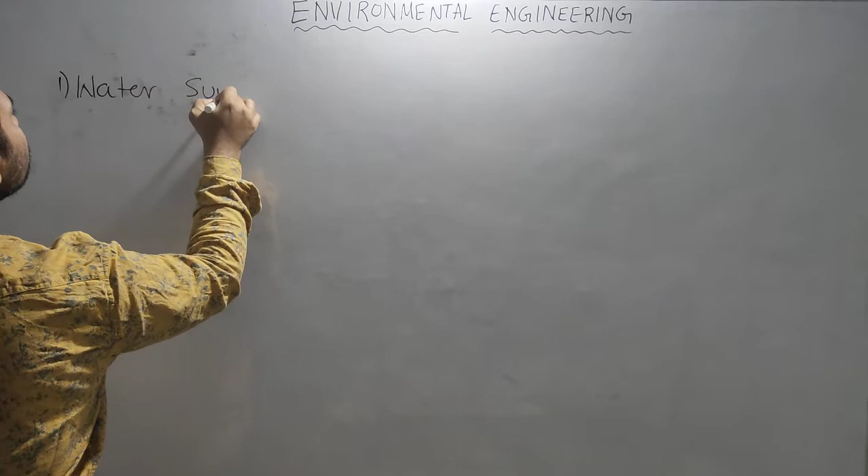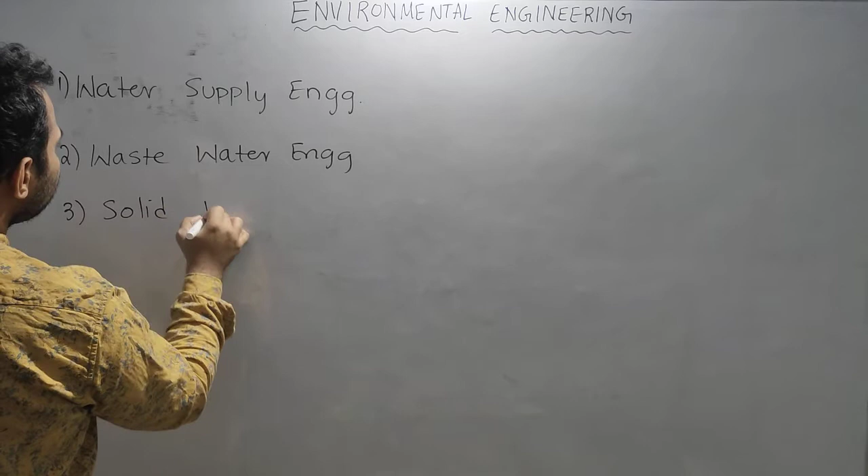This topic is broadly classified into water supply engineering, wastewater engineering, solid waste management, and air and noise pollution. These are the topics we are going to cover in our environmental engineering subject.

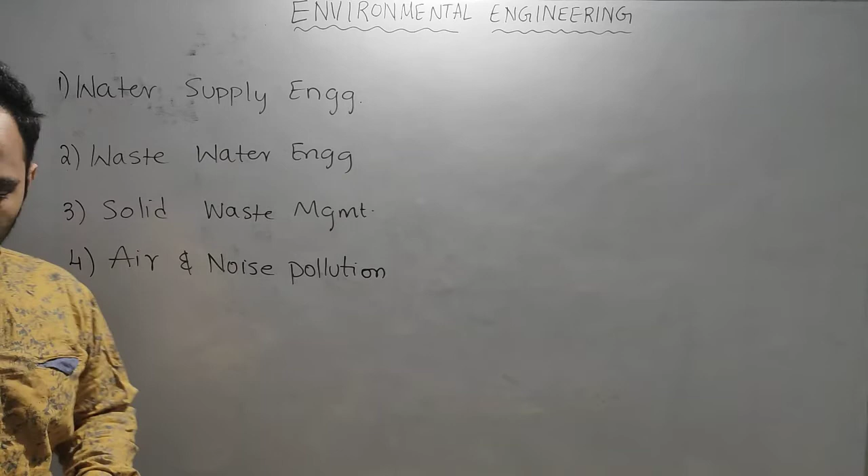Let us start with the water supply engineering. What is meant by water supply? Where it starts, where it ends. What are the various components of this water supply engineering, and how to design those components, what is the criteria of design, all those things we are going to learn in this subject.

Water supply engineering, see, it is a supply, we are giving water. So if you are giving water, then you need to have the water first. Where will the water be present? So water may be present in oceans, seas, rivers, or lakes.

Though water is present in oceans and seas, purifying that water and making it fit for drinking is a costly affair and not necessary for a country like India, because we have plenty of fresh water in the form of various rivers. That is why we use river water for water supply. So the sources are the rivers.

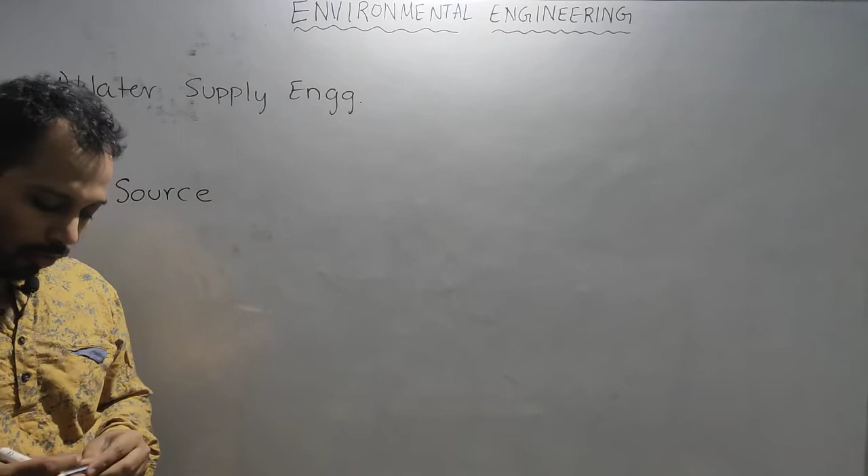Our water supply engineering starts with a source, and the source may be any river. Again, this source may sometimes have a lot of water, but that water availability will keep on fluctuating. Some rivers are perennial rivers, but many of the rivers in India are not perennial.

They are non-perennial rivers, so the source is fluctuating, but the demand is constant. Every day we need the same amount of water for bathing and cooking, so the demand is from the community side and it keeps increasing as population grows. But the source fluctuates - in the rainy season there is plenty of water, whereas in summer the source may have less water.

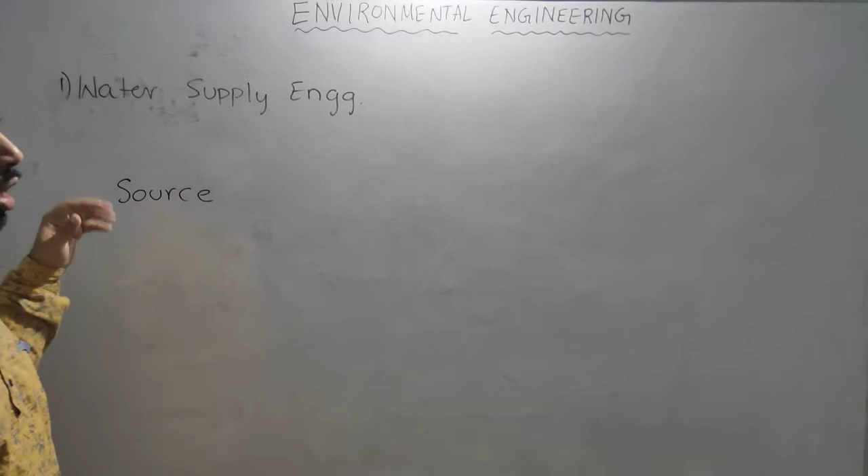So if the source is non-perennial, we need to construct a project there to stabilize the demand, to stabilize water availability to meet the community's demands. That is why source fixing plays a very crucial role in water supply, because water supply completely depends on this part. Without a proper source, your complete supply chain will get disturbed. That is why finalizing the source is a very crucial thing.

Once the source is finalized, the rest can be done easily - it's just financial. The rest of the system is man-made, but the source is God-given, natural. This needs to be finalized very carefully, otherwise the rest of the system, which is man-made, will be of no use.

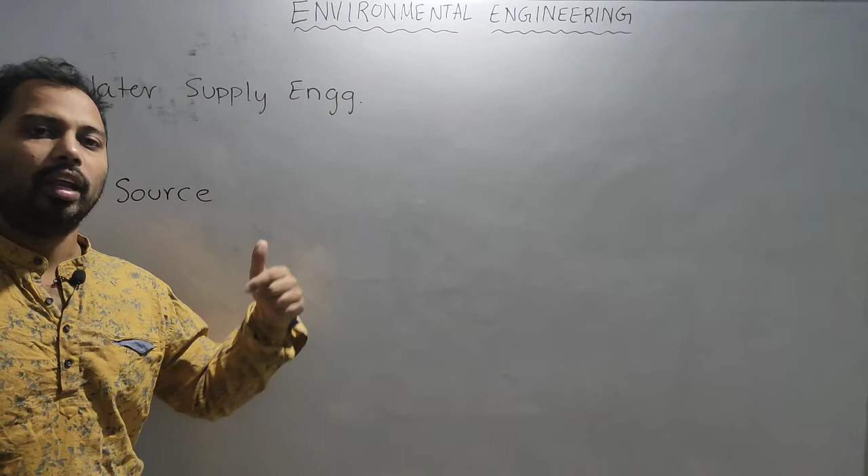So after the source, now you have some water. The first question is whether it is good water or bad water - whether it is fit for drinking or not. Obviously it is not fit for drinking these days. Earlier, in ancient times, industrial and agricultural activity was very limited, but these days both are happening in a huge manner.

Whenever you do agricultural or industrial activity, you get effluents. Where do those effluents go? You have no place to dump them other than the environment. The environment has a lot of patience - it gives you fruit, and you dump waste into it.

So in the early stages, maybe the source might have been fit for drinking directly, but these days we never find a source fit for drinking directly. Even our immunity system cannot withstand even small impurities in the source. That is why the source water needs to be treated.

Then what treatment do I need to give? If you go to a doctor, he will not give you medicine directly just by looking at your eyes - he will follow some protocol like a blood test or x-ray. Without testing the water, how can we find what kind of impurities are present and what kind of treatment is needed? So generally, after finding a source, we check the quality of the source.

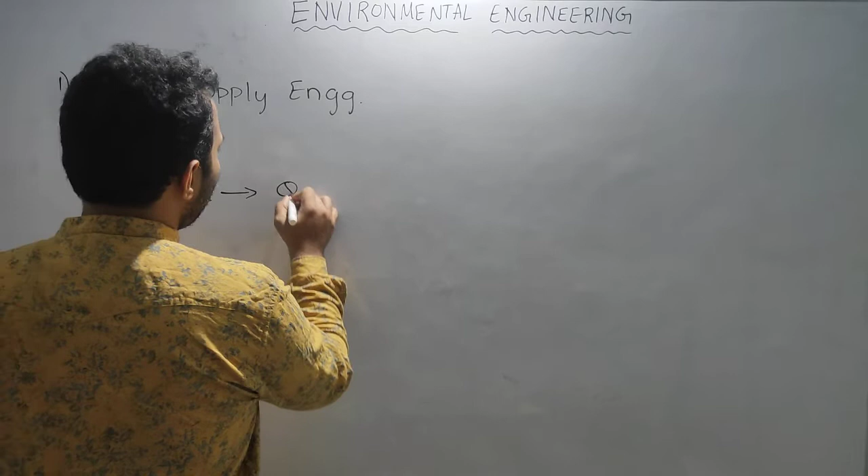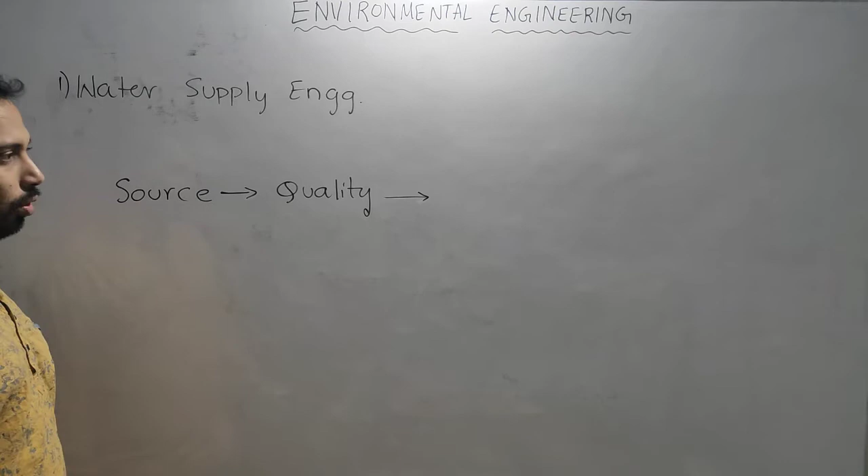We check the quality of the source. Once you find the defects while doing the quality check, you will do treatment for those defects.

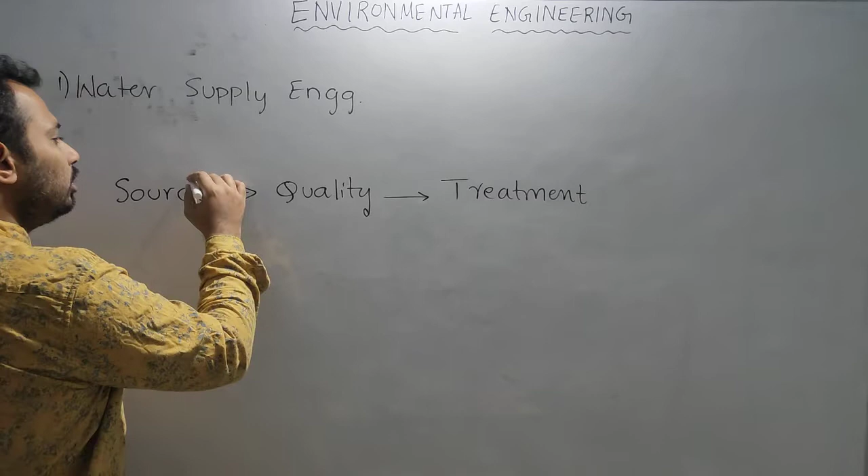For this treatment, we need conveyance of water, because the source and treatment may not be at the same location - it may be or may not be. That is why generally we need to convey the water from source to treatment. That is called conveyance. Quality checking is a kind of testing, it is not part of the supply chain.

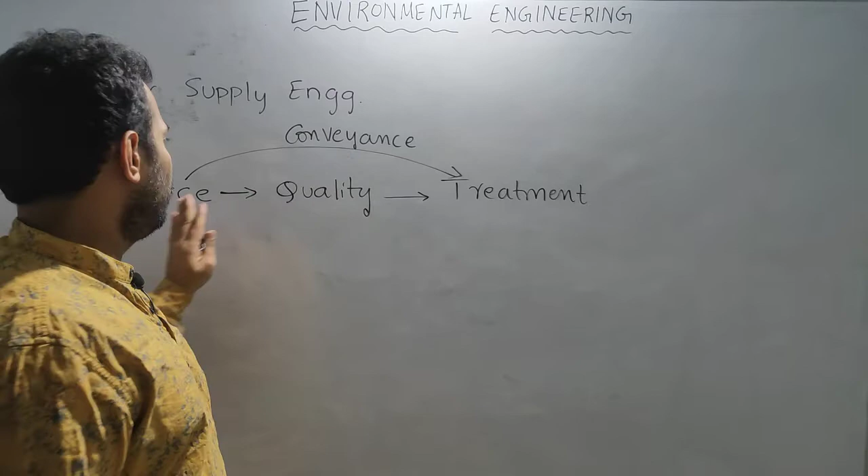In the supply chain, from source to treatment I need to convey - this is a component, quality testing is not; it's just a requirement. Conveyance needs a structure, quality testing does not need a structure - it just needs testing apparatus. So it is a different thing.

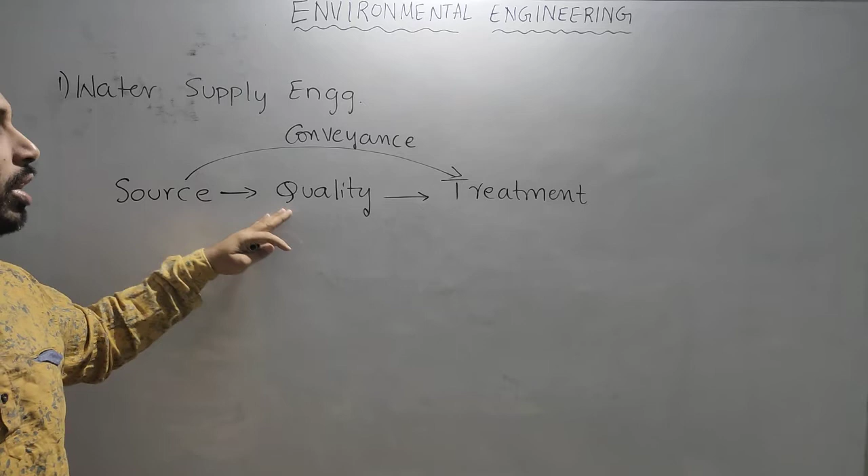So once conveyance is done, we do treatment of the water for whatever quality problems are there in those areas. After proper treatment, we send it to storage or directly to the community.

So community, see, or we will send it for storage. And meanwhile, treatment has two types.

One is conventional treatment, and another one is miscellaneous treatment.

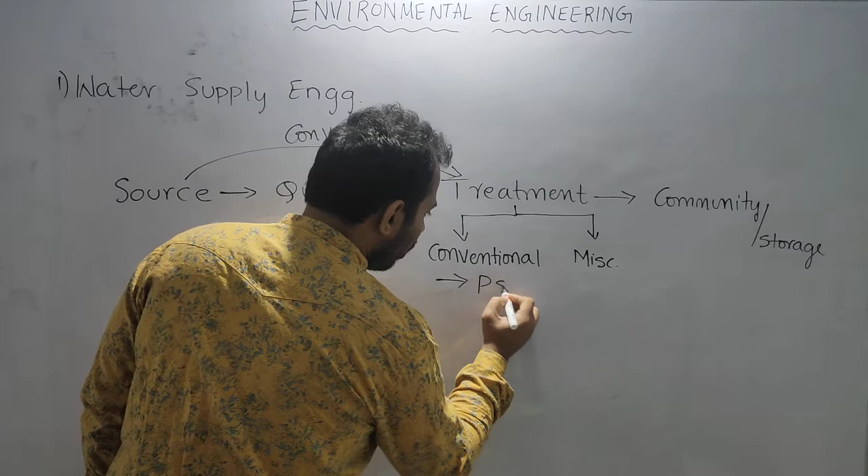Conventional treatment means the primary sedimentation tank or secondary sedimentation tank, filtration or coagulation, and disinfection. These things are conventional, because for every kind of water we need these kinds of treatments.

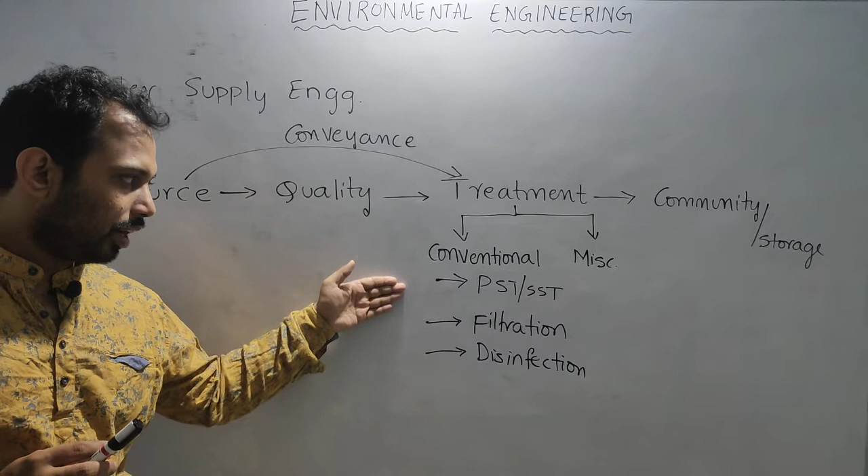The primary or secondary sedimentation tank is needed because water may be having suspended solids or colloidal solids, and may have microorganisms in it. So these conventional treatments are present for every kind of source, and also some more are there, which I will discuss later.

Whereas if you see the miscellaneous treatment, for example removal of hardness, and also removal of fluorine, these things are miscellaneous.

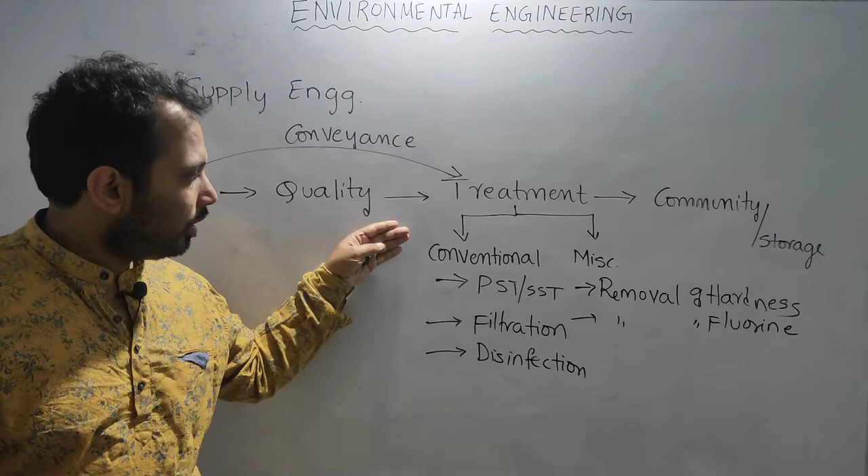They don't present for all kinds of water. So they are area specific, regional specific - only those waters need it, but these kinds of impurities are present everywhere. That is why we need to provide conventional treatment as well as miscellaneous treatment whenever it is necessary.

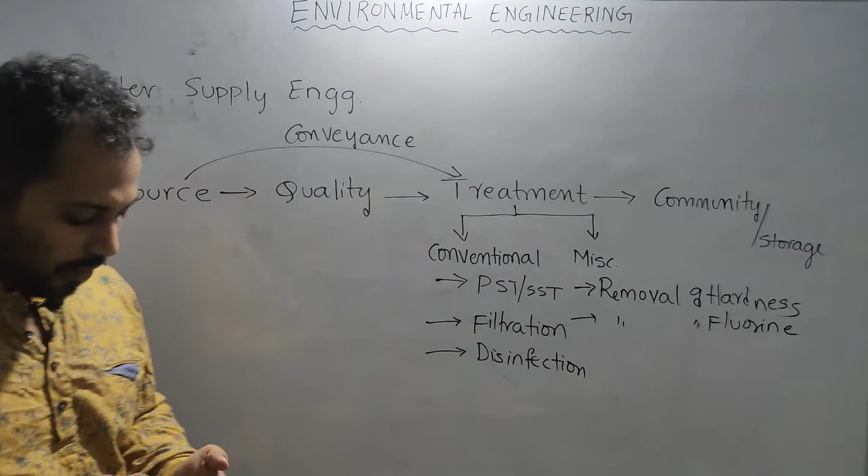And then we will send the water to the community. So now this is a broader understanding of the supply chain of water supply engineering.

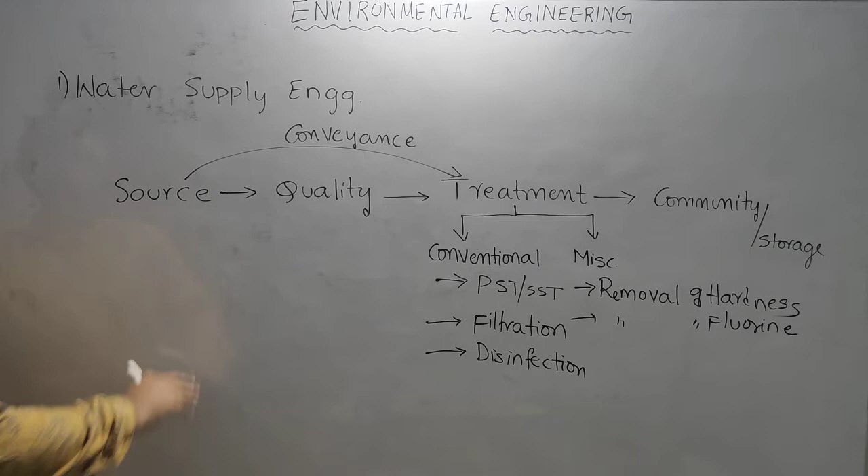So let us come to the first and foremost and prime important component of our water supply, that is source. So how to fix up a source?

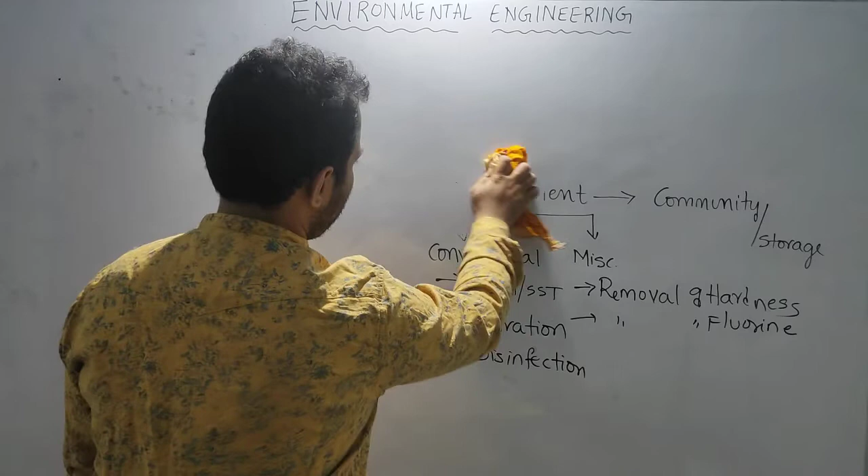Source can be finalized by taking the demand into consideration. For example, if you are feeling thirsty, you'll go to a shop and purchase a water bottle. Now if you are feeling too much thirsty, you will purchase a 1 liter water bottle. Or if you are going somewhere where you don't find any water, then you will purchase more water in order to cater to future needs also. Whenever you are going outside where you don't find proper water, you will purchase one more bottle for yourself.

So apply the same concept to a community. If you are feeling more thirsty, you will purchase a 1 liter bottle. If you are feeling less thirsty, you will purchase a half liter bottle. And if you are having your friend with you, then you will purchase one more bottle. And if you are going to a place where you don't find water, then you will purchase one more bottle for the safety of future needs also. So it's the same thing which we do in our real life.

See, whenever the community - community means the public - where you are sending this water, their need may be fluctuating. It might not be the same, it may be fluctuating, but whatever the need of those people, I need to cater to those needs, isn't it?

So here, fixing of a source can be done by keeping three things in mind.

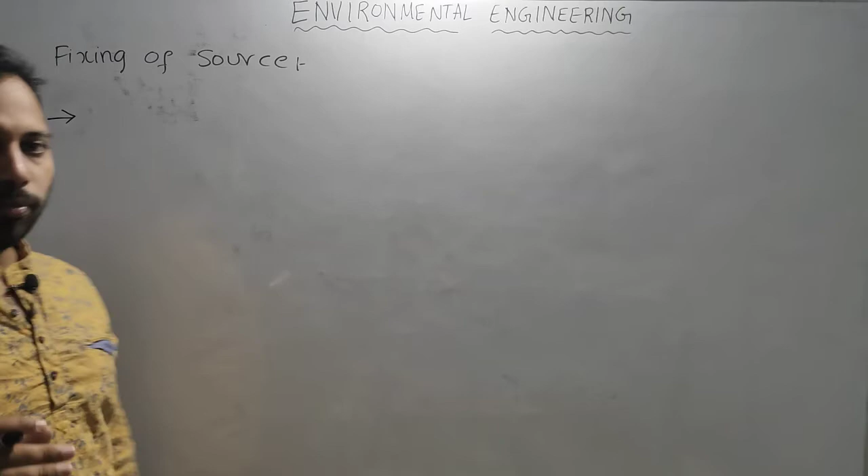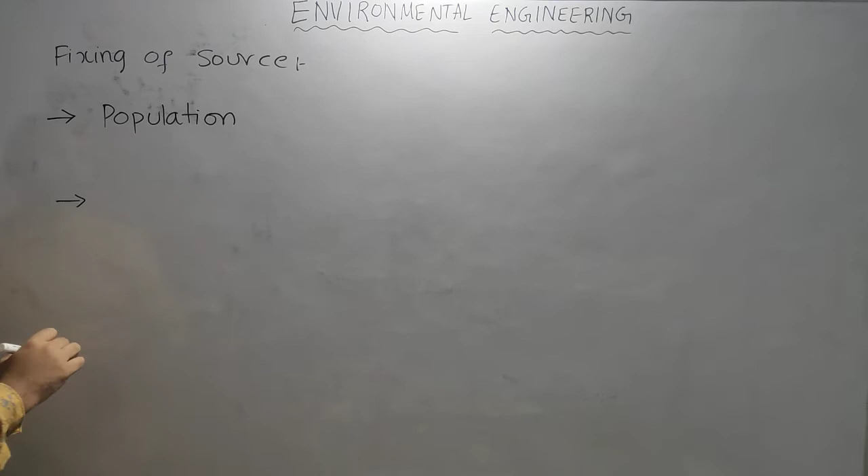So here the first and foremost, who are taking the water? The population. Community means what? Population. So we need to first find what is the population, and this should be at the end of the design life.

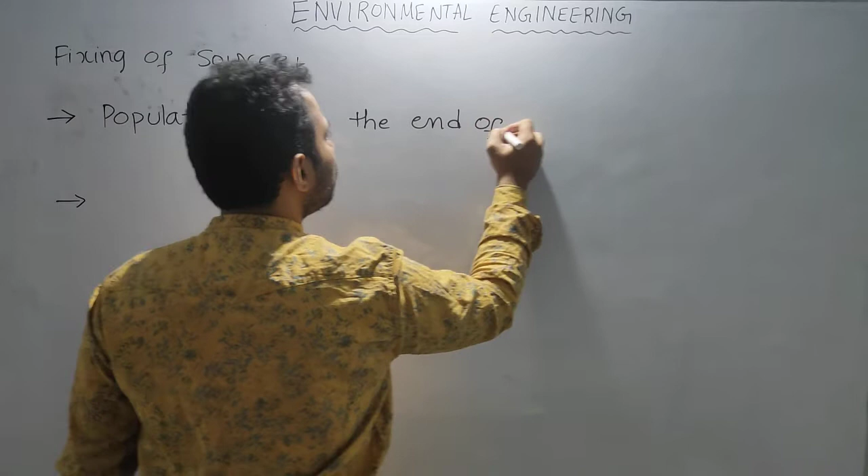At the end of design life - that means whenever we construct any structure, either it may be a reservoir, or a treatment unit, or a conveyance plant, or a distribution system, we construct various components to supply water to a community. Whatever be the component, every component will have a design life.

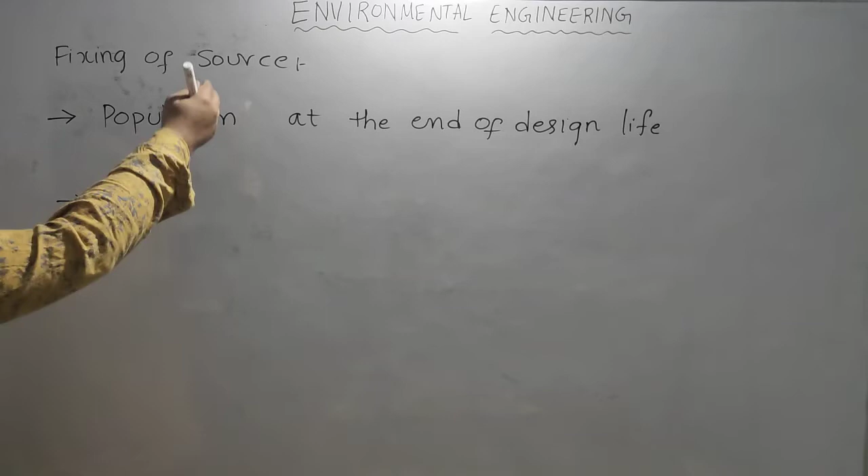In that design life, the source will have more design life than any other component, because the source is meant to give a constant supply to the community, though the river or the source is fluctuating, so we need to construct a reservoir there. If you are constructing a reservoir, it is a big deal to acquire the land and all - we cannot easily construct reservoirs like that. It is a very costly affair to establish a source, and it needs a lot of human involvement, like acquiring land from many people, villages, evacuation - all these things are very tough to do.

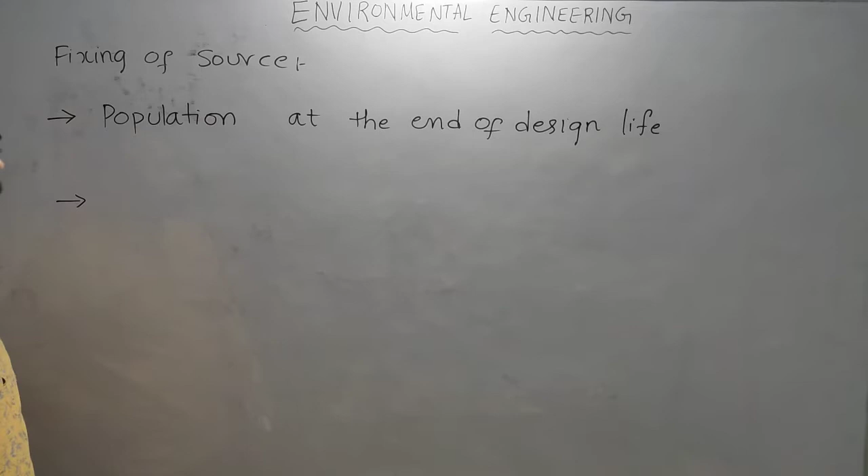That is why generally we keep a larger design life for sources especially, whereas the rest of the design can be easily re-established. It does not affect as many people as a reservoir or a source will do. So that is why the population matters, because this source has to feed the water till its death.

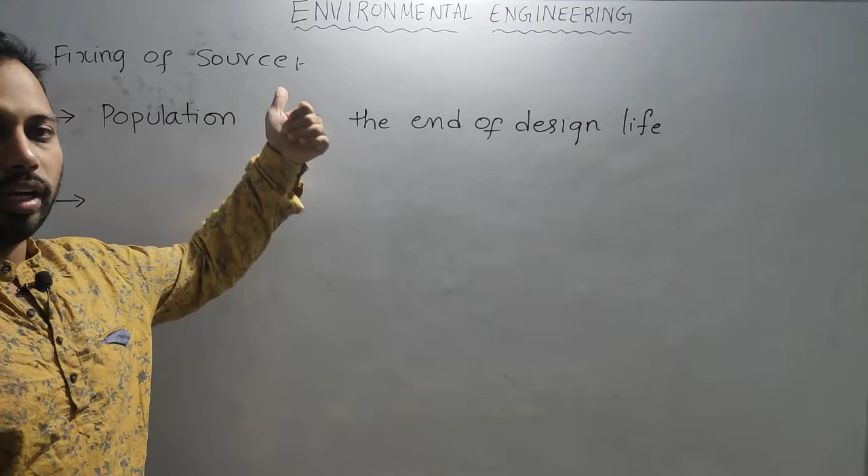Till the end of the design life, the source has to feed water to the community. So if it is working at the end of the design life, that means at the end of the design life, whatever population we are having, it has to give water for them too. That means we need to first forecast the future population, and what the future population needs in terms of water.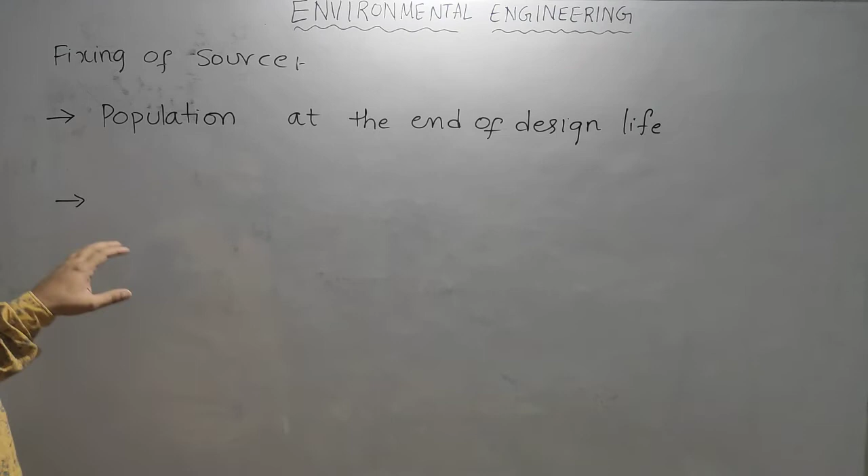That much amount of water, whether it is present in the source or not, we need to first verify. If it is not present, what is the sense of investing crores of money in establishing a supply chain? We cannot easily rebuild or replace this supply chain with another source. It is not a simple switch on and switch off. If you construct a full supply chain and then find the source has been lost, you need to shift the supply chain to another source. Shifting is not easy. That is why we need to first check whether the source is sufficient or not. This is called source sufficiency.

We also need to check this. Source sufficiency can be checked by the population at the end of the design life, and also the rate of demand.

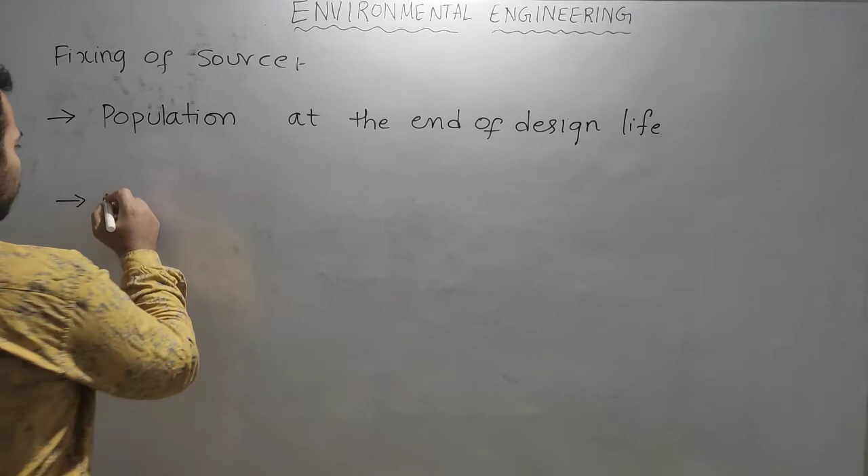Rate of demand - as I told you, if you are feeling thirsty, your rate of demand is 1 full bottle. If you are not feeling thirsty, your rate of demand is half a bottle. If you are thinking of storage, your rate of demand is 2 liters. So you now understand how important this rate of demand is for a big population. For a single person it fluctuates from 50% to 150%. So 1 bottle, half bottle and 2 bottles mean a lot of variation and fluctuation.

That is why the rate of demand also fluctuates like that, so we need to establish a uniform rate of demand. If you know the rate of demand - meaning a single person's need - and multiply it with the number of persons, you get the community's demand for one day.

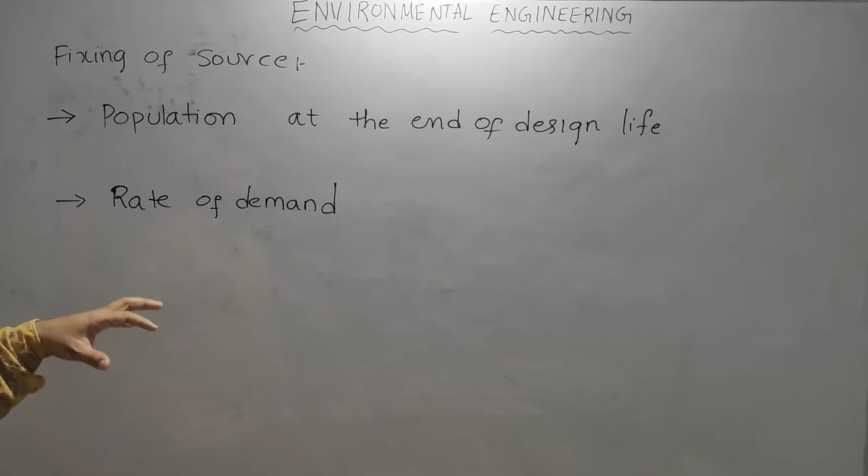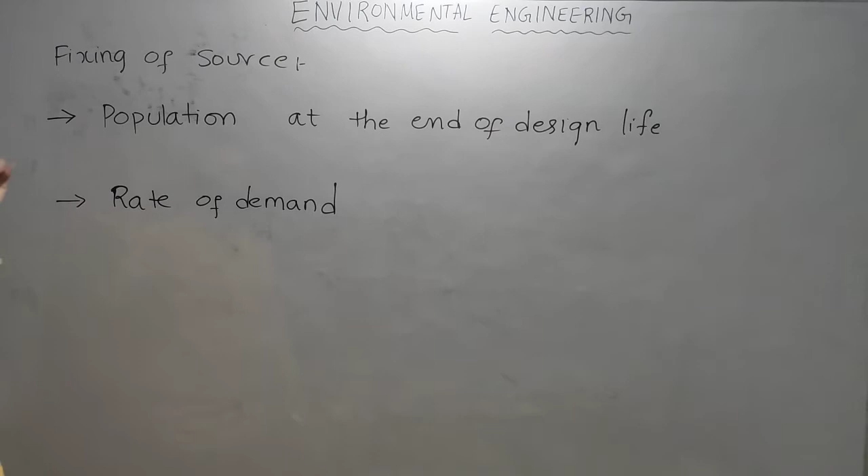What is the community demand for 1 year? What is the community demand for 10 years? Likewise you can get the total requirement of water till the end of the design life, which helps us understand the source sufficiency. And the third one is the design life. We are doing all this exercise by taking design life into consideration - what are the design lives of various components in the water supply system? These three things will decide the source sufficiency.

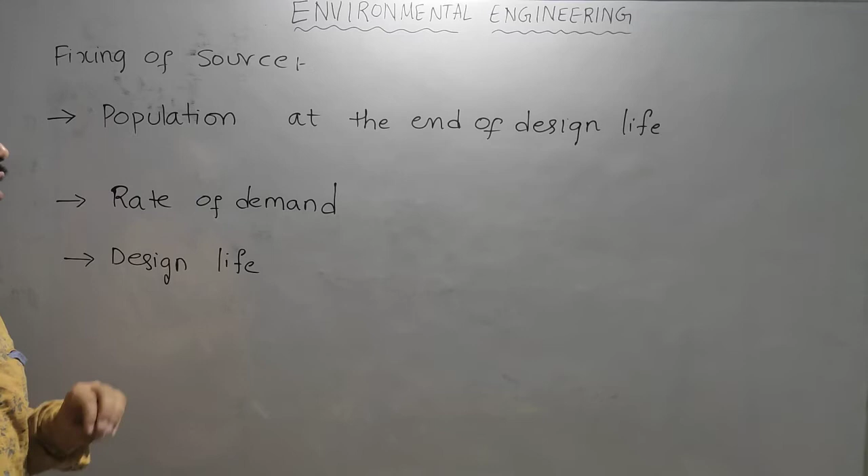Whether the source is sufficient or not will be understood by these three concepts. So now our next topic is knowing about these three. If you know these three, then we can find whether the source is sufficient, whether it has sufficient amount of water or not - we can identify this only by knowing these three. So let us start with population now.

Population varies from place to place. The growth of population in a city varies, and among cities also it is different. If you look at Delhi, the population growth is different. If you look at Mumbai, the population growth is different. If you look at Chennai, it is different. Different cities have different geographical conditions, and accordingly different growth factors are there, which affects the population growth.

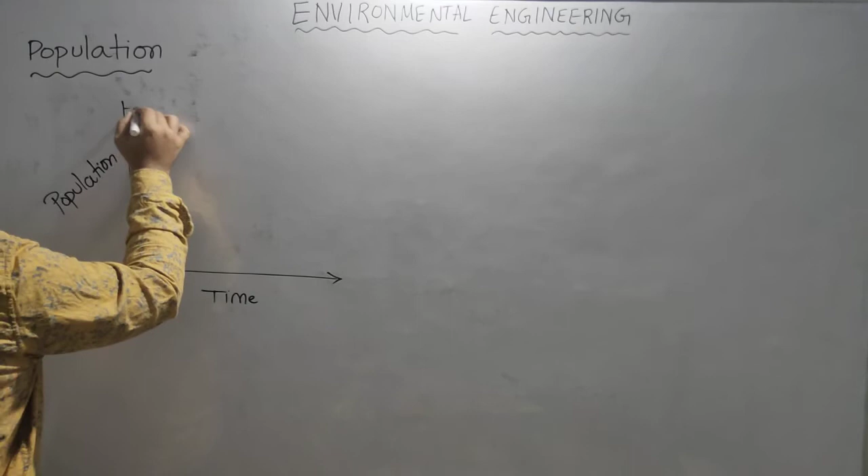Now, population - population variation can be known from a logistic graph, drawn between population versus time. Time on one axis, population on the other. This is PS - saturation population. This is PS.

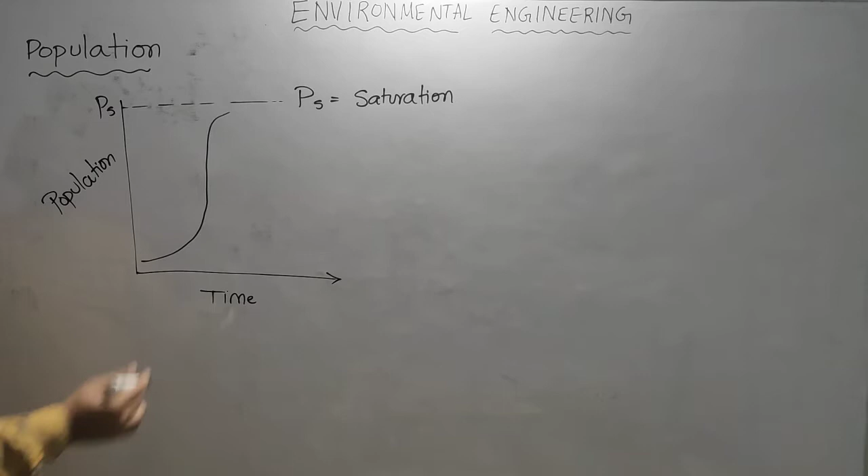So the graph will be like this - this is called a logistic graph. In this logistic graph, there will be different points where the curvature is changing, and those points need to be understood clearly, because where the curvature changes, it is entering into a new phase.

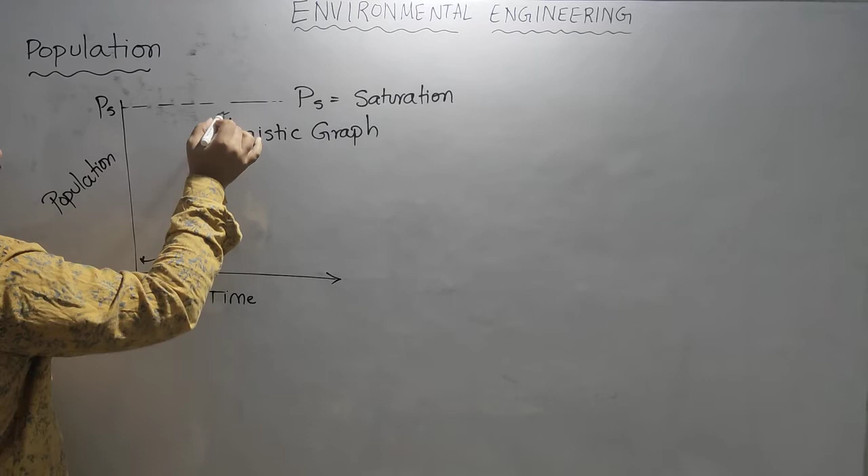For example, here the curvature is changing, here it is changing, so here it is changing. I will divide it into segments of different uniform curvatures - here it is uniform, here it is uniform, here it is another uniform curvature. Let us name them A, B, C, D and E.

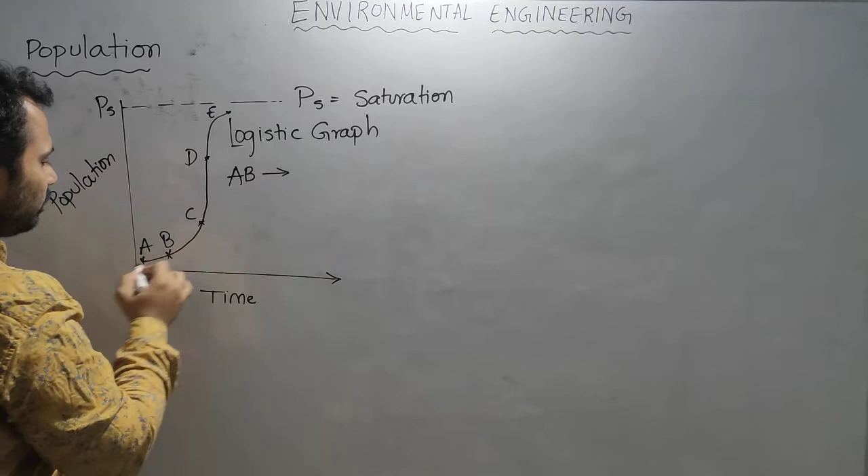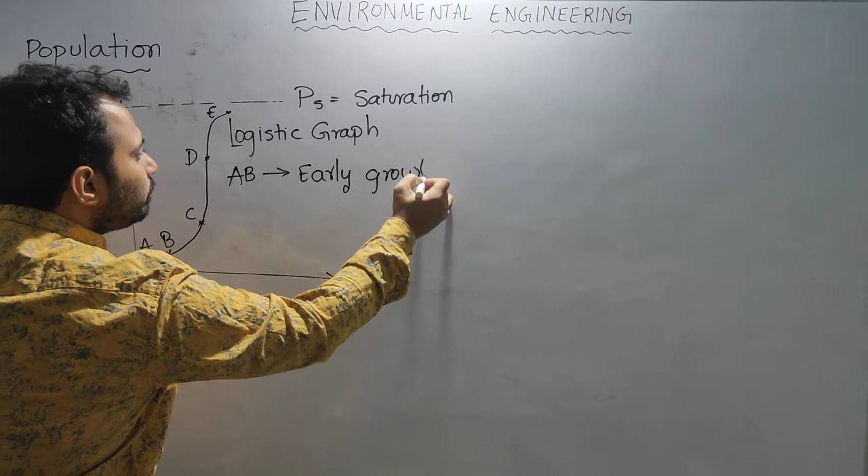See, AB - the curvature is very small and gentle here, so we call this early growth. And BC is exponential growth.

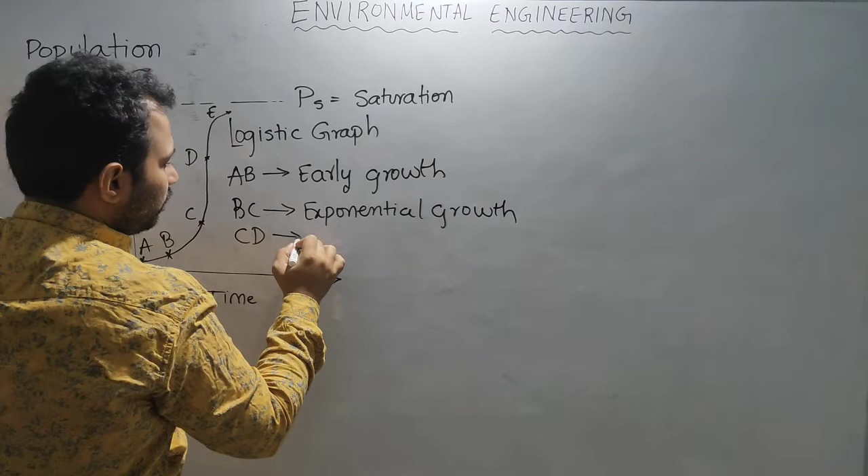CD, if you look at the graph, it is completely straight, vertical. That is why we call this constant growth. And DE is late growth, or delayed growth.

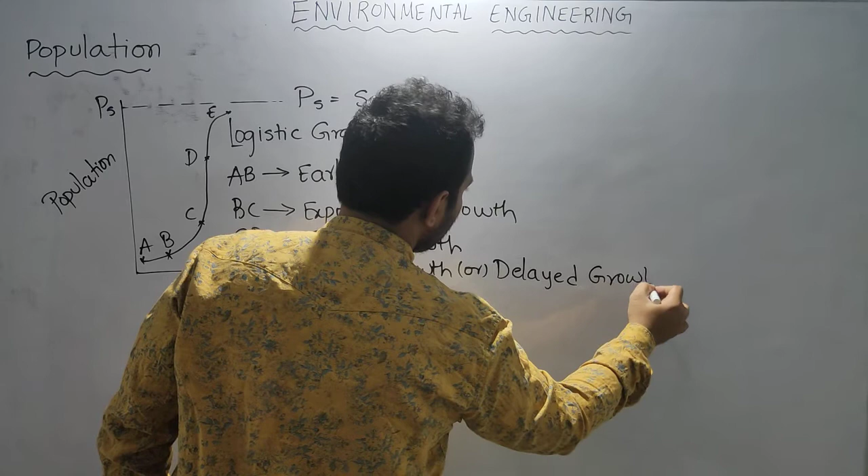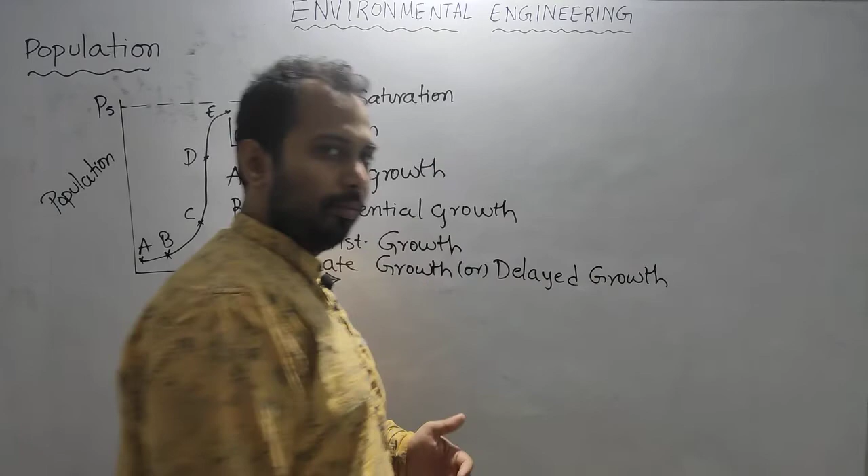So these are the different growth rates. Any city you take, it may fall into any kind of these growth rates. If it is a young, very new city, then it will come into early growth. If it is rapidly growing, then it comes into exponential growth. And if the city is already established, well grown, then we will be having a constant growth there.

And if the city is too old, very old cities, the growth cannot continue because it is already completely grown. Then the growth will go on decreasing, and finally it meets the saturation point. When it meets saturation, growth possibility is not there. Already too much space is being completely exploited. No space is available, so very limited space is there for growth to happen.

So that is why generally in very old cities you will observe late growth or delayed growth. In emerging cities, exponential growth. In cities already emerged but not too old, there is constant growth. And in cities yet to grow, you will find early growth, because we design this water supply majorly for cities and towns, so they will fall into one of these categories. Early growth is not a big problem, so we can easily control water over there.

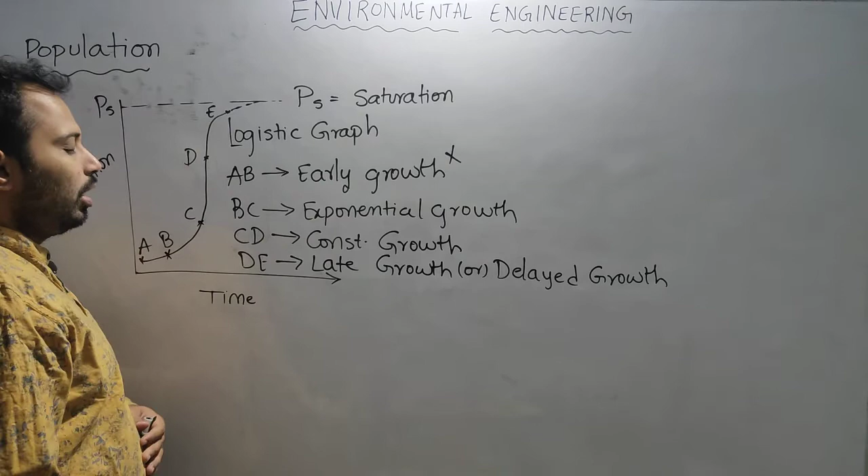And delayed growth also, the system is already completely existing there, so it is not a big deal for us to cater to the needs. But whereas these two, exponential and constant growth growing cities, where the majority of cities fall, there I need to look carefully and design the water supply system.

So let us go to the first one, that is constant growth. I will pick constant growth first, and then we will discuss the exponential growth.

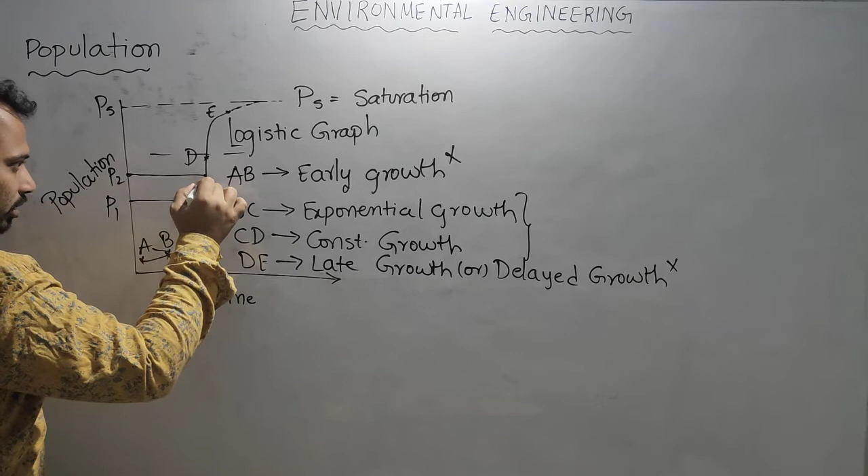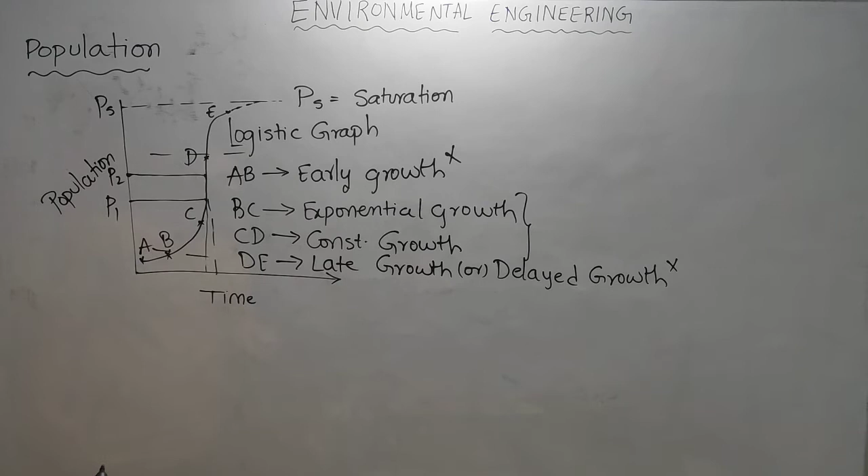So for constant growth, let us take this as P1 and this as P2. If you look at this, dP, and what is this? Time difference, so there is a small time difference here. So dP by dt. So for any population you take, this dP by dt will be constant here.

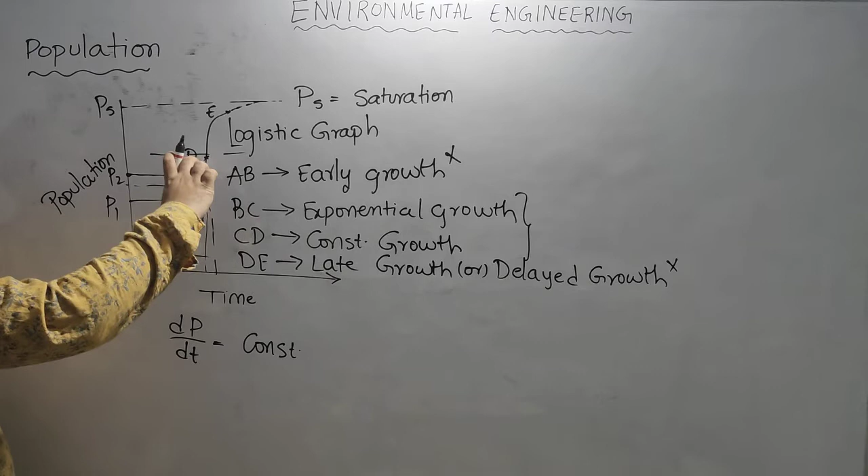So in constant growth, the rate of change in population will be constant. Constant growth means the slope is constant here. For this graph, the slope is constant, that means dP by dt is constant.

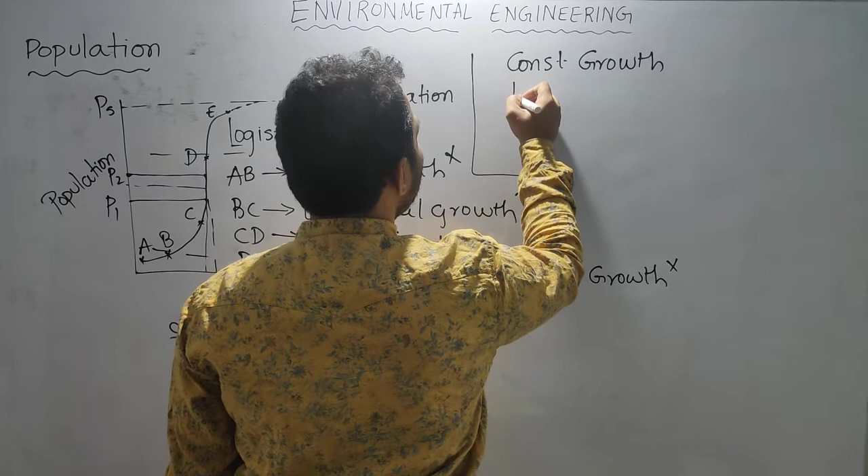So now if dP by dt is constant, then dP is equal to k into dt, let us take this as k. So I will integrate it between two populations, P1, P2 and T1, T2. Now this is nothing but dP's integration is P with limits P1, P2, and k into dt's integration is t with limits t1, t2.

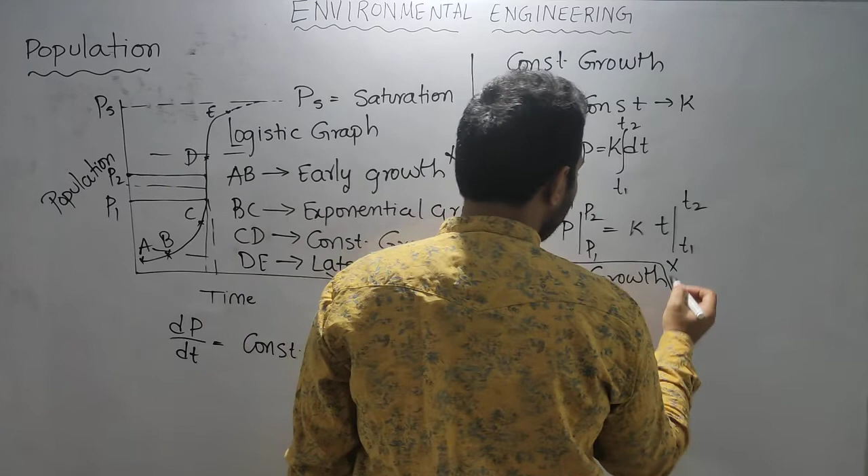Now, substitute the P2 and P1 values, so P2 minus P1 is equal to k into t2 minus t1. So P2 is equal to P1 plus k into delta t. So this is the formula we have derived from the constant growth.

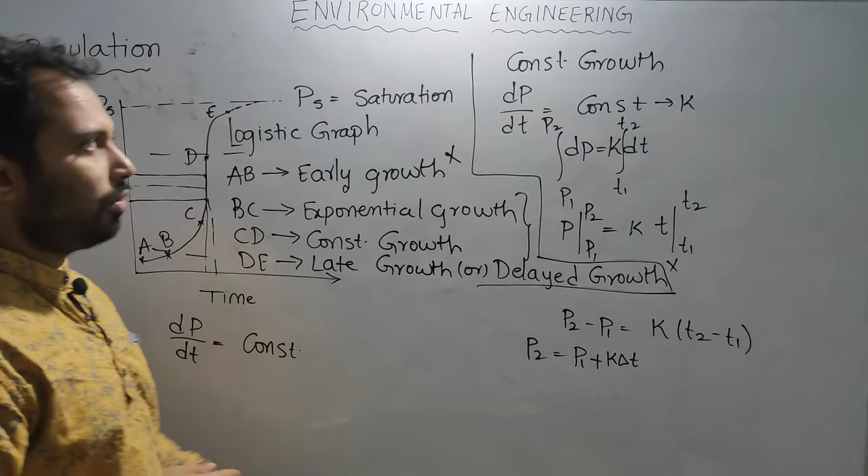So let us discuss in detail about this.

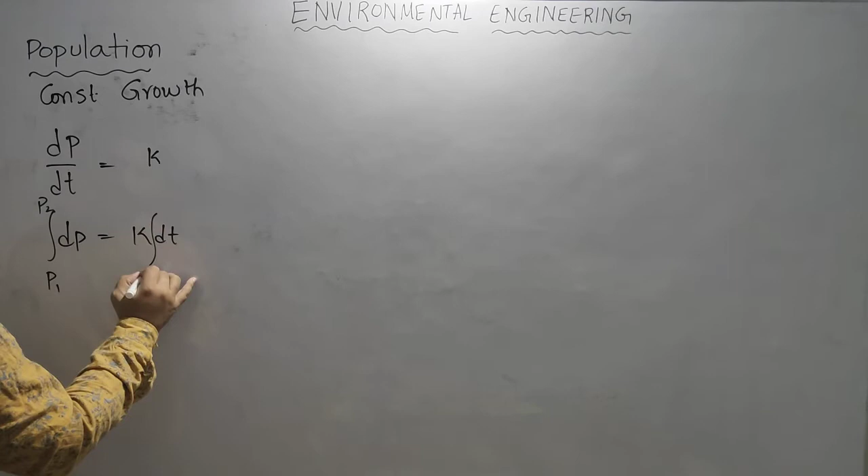So dp by dt is equal to k, dp is equal to k into dt. Integrating it from p1 to p2, t1 to t2, we get p2 minus p1 is equal to k into t2 minus t1. So p2 is equal to p1 plus k into delta t.

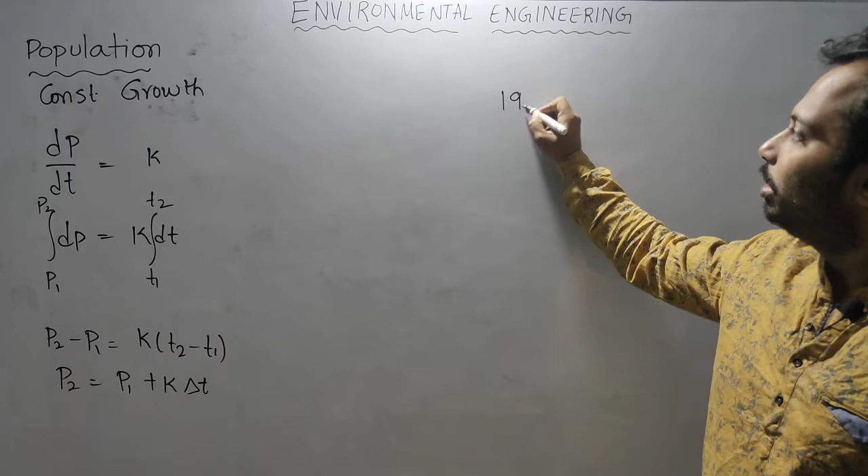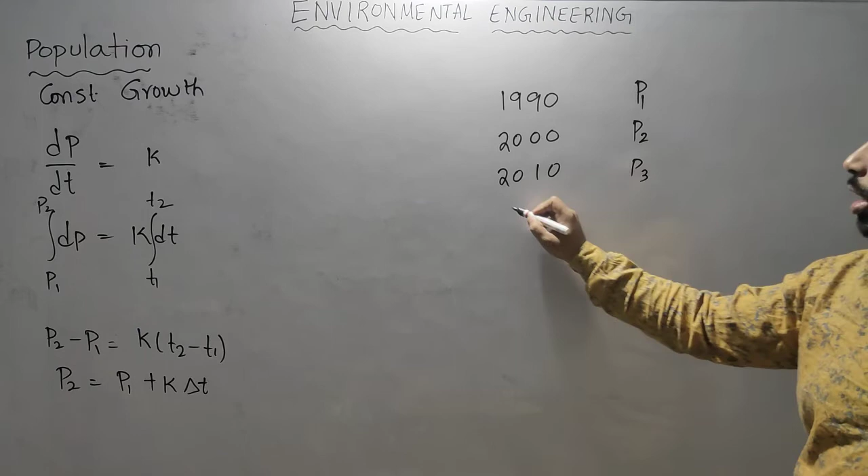Now for example, we are having population data like this. So 1990, let us have the population P1. And 2000, because we will be having population data for every 10 years, as we get census data every 10 years, so it is P2, 2010 it is P3, and 2020 it is P4.

Okay, I want the population in 2050.

Here K, what is K? K is nothing but dp by dt. So dp by dt means, dp is p2 minus p1. So what is dt here? dt is 1 decade, isn't it? It is 1 decade.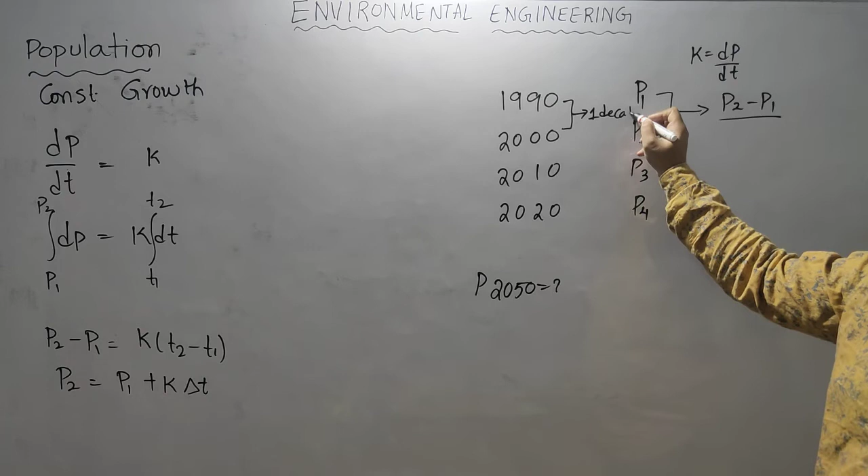Similarly here, if you take p3 minus p2 by 1 decade, and here it is p4 minus p3 by 1 decade. So we take this as x1, this as x2, this as x3. Then we will take the average of this, since there are different dp by dt values for each interval.

To have a uniform dp by dt, what I will do is take the average of all the readings which I got, and so on, divided by the number of readings. So x bar is nothing but sum of all values divided by the number of values, then you get x bar. X bar is nothing but the average of k, that is k1, k2, k3, or x1, x2, x3. Then x bar is the average value.

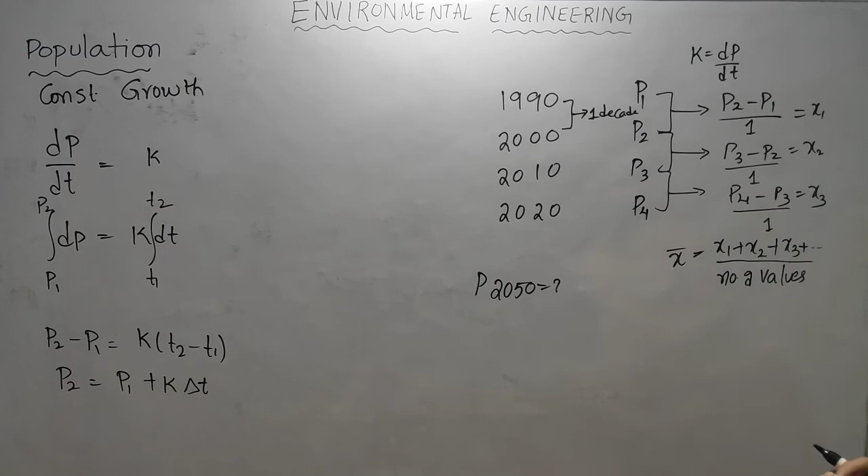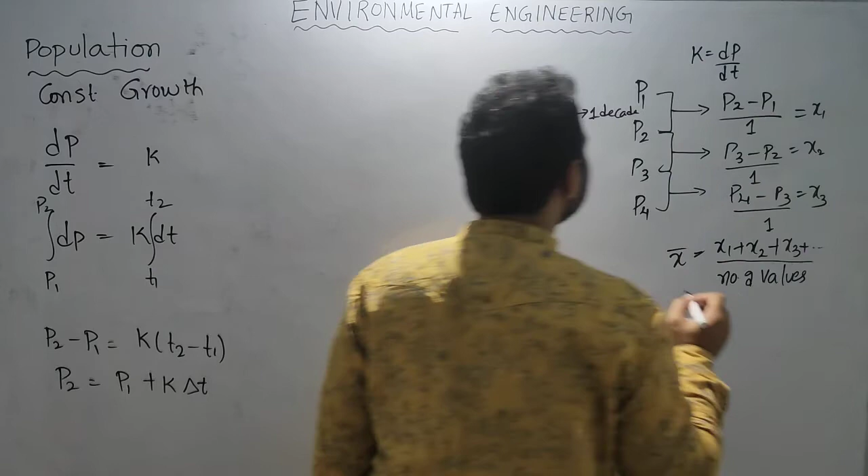Now this x bar is per decade, not per year, because everywhere I am dividing it with decade. So what is delta T then? Delta T also should be in decade, because the unit of this is population per decade. So the x1 unit is population per decade. This is decade. So if the unit of this is population per decade, then delta T unit should also be in decades only, then decade and decade will get cancelled and you will get the population.

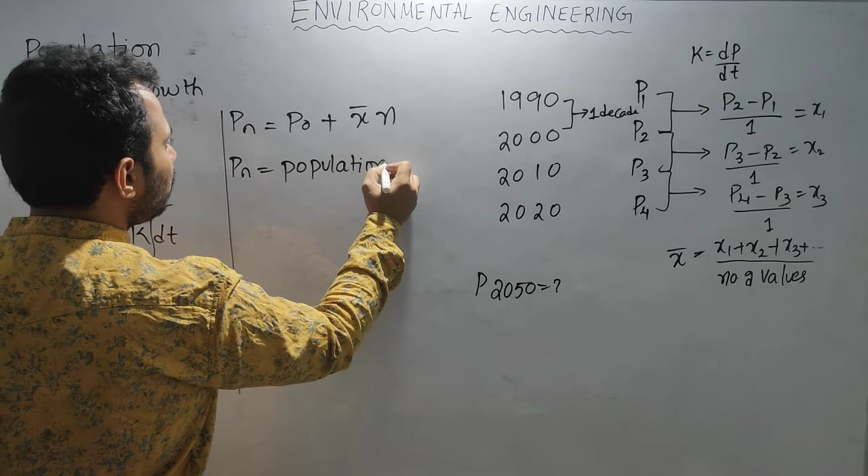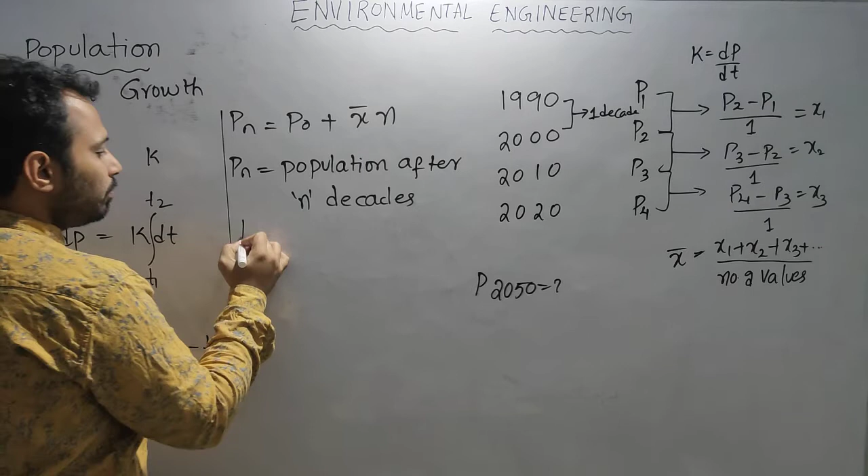Pn is equal to, so I am writing now a uniform formula. Here I have taken between two values, but if I put P2 as Pn, then P1 will become P0. So this K will become X bar and delta T will become N. So this Pn is population after n decades. P0 is latest known population.

Latest known population. So here in this case it is 2020. And Pn is population after n decades. N decades means 2020 to 2030, 2040 and 2050. Here there are 3 decades. So latest known population is 2020, and we want population in 2050, meaning the difference is 3 decades. X bar is average growth.

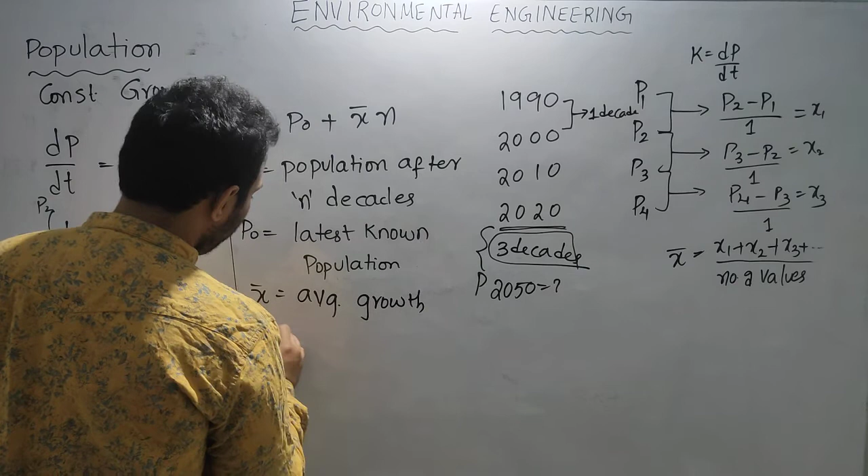Average growth, and n is number of decades. So if you are finding a city where the growth is constant, then we can find the population after n decades using this formula. And this formula, if you see, represents the nth term of an arithmetic progression.

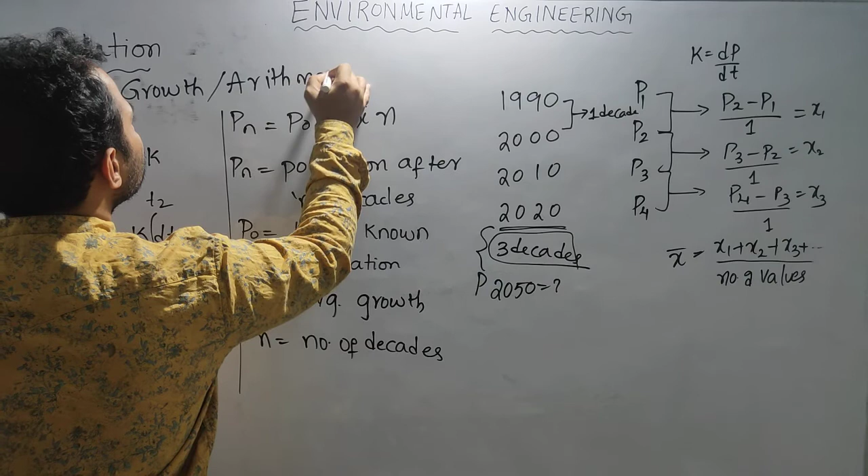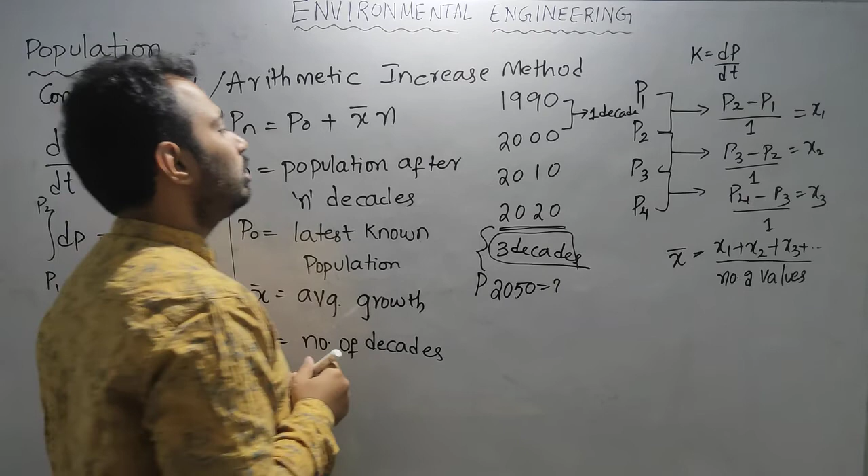That is why we call this method as arithmetic increase method. So this is arithmetic increase method, which we apply for old cities where the growth rate is constant. So in those locations only we are going to use this arithmetic increase method.

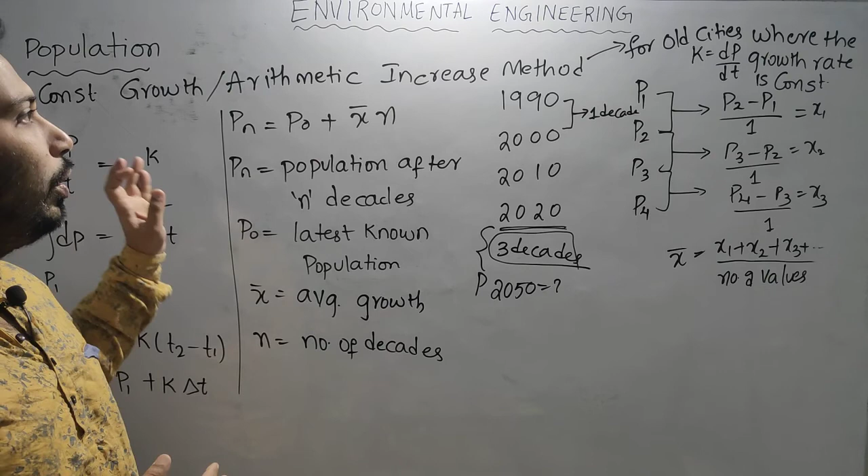Okay, so the next method is geometrical increase method, which we will discuss in the next session. So this is what we have discussed: the introduction part of water supply engineering, and to find source sufficiency we need to determine the population. For knowing the population under various conditions, we discussed the arithmetic increase method. In the coming lecture we will discuss geometric increase method, incremental increase method, comparative graph method, simple graph method, all those things to forecast population. Thank you so much.